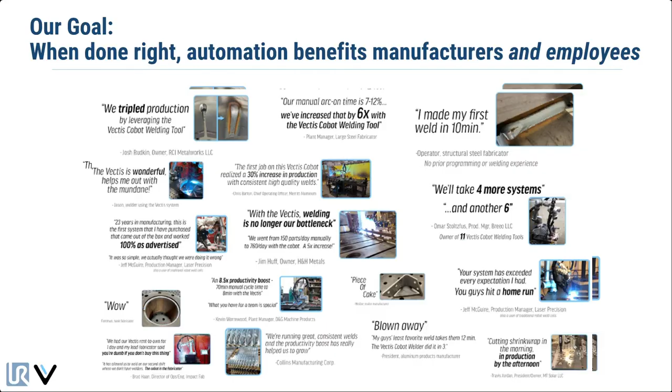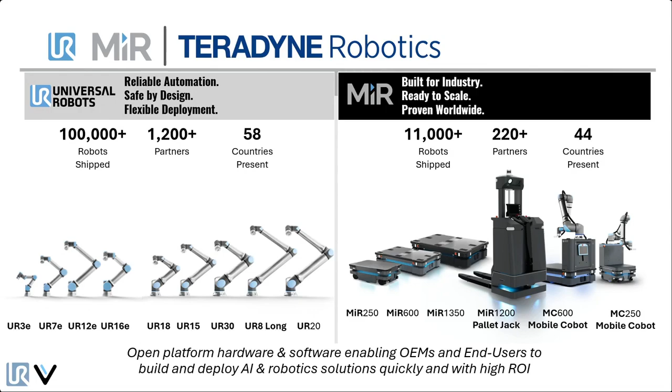So before we jump into who Vectis is, a little introduction on Teradyne Robotics. We have both Universal Robots and MIR, Mobile Industrial Robots. On the left, you can see our entire product offering, ranging from 3 kilograms all the way up to 30 kilograms payload capacities. On the right, we have our entire mobile robot platform, ranging from 250 kilogram deck loaders all the way up to 1,350 kilogram deck loaders, as well as pallet jack and mobile cobots. Today we're going to be focusing on the left side of the screen, but just to give you guys a picture of who Teradyne Robotics is as a whole.

Specifically when you're looking at the welding world, one of the biggest driving factors is an aging workforce. There are going to be a boatload of welders retiring over the next 15, 20 years, and this is a very powerful tool to help ease into that and really scale up the younger generation.

Economic factors that are driving automation include rising labor costs. Everyone knows how expensive it is right now, and with rising labor costs it is much more painful every time you lose labor. Automated welding solutions are allowing manufacturers to hang on to labor because it takes away some of the dull, dirty, dangerous work.

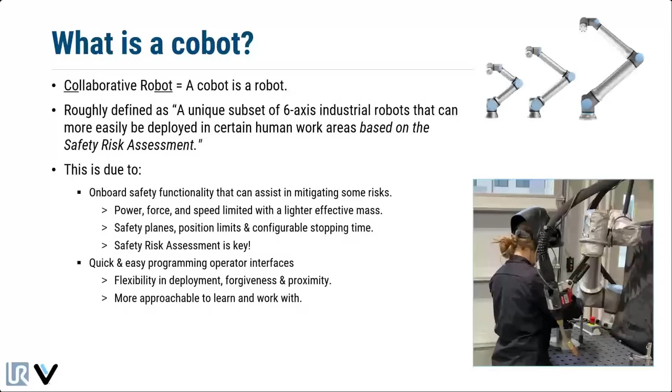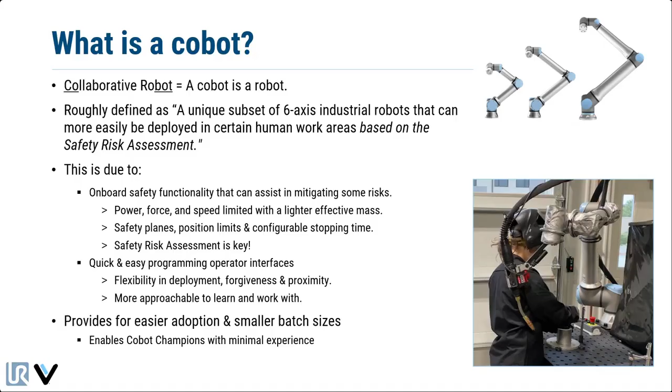With the easier, more intuitive interface, it allows for small batch sizes to be a lot more digestible. It's not taking you hours to set up parts, taking you a couple minutes to set up a new batch. So it allows you to automate a lot more parts rather than spending hours programming one new part.

You are going to be eliminating the dull tasks to keep your skilled laborers doing things that are more difficult to automate. You want to get the mundane stuff out of the way. You're trying to keep your environment as safe as possible. You're reducing repetitive stresses on any of your operators. You're giving them a fun new tool to utilize that's making their life that much more entertaining.

And you can also do all of this in a smaller footprint, which allows you to be more flexible with how you guys are going to be utilizing your overall factory footprint.

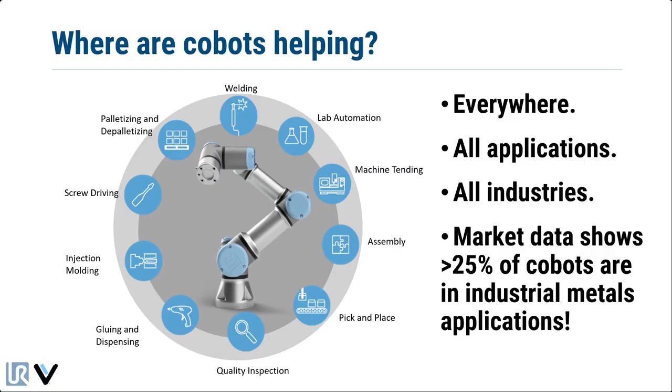Really anywhere that you have repetitive labor is a place that we can look to automate and help move that labor somewhere else, and really try to maximize the efficiency of your workforce.

So we've talked a lot about the robots so far. Robots are pretty useless without trusted integrators. So at this point, I'm going to pass it over to Josh to tell everyone about Vectis Automation.

Awesome, thanks Tommy, and thanks for that introduction as well. Like Tommy said, like I shared before, my name's Josh, one of the co-owners, co-founders at Vectis. We founded Vectis in 2019 with the goal of making automation more accessible, more approachable, more affordable for the metal fabrication industry.

Myself and many of my colleagues come from the traditional robot world. My first job was programming traditional robots and welding applications and managing those projects, and being kind of under the hood, out installing them, deploying them, servicing them. And over that time, really realized, hey, how can we make this easier?

Right around the time that we wanted to make automation easier and more accessible was when cobots were really coming to prominence through UR. Tommy may have mentioned it, but UR has been around for over 20 years, and cobots have been around for a long while, but they really started coming into prominence around 2018, 2019. So that's when we founded Vectis Automation to say, let's turn these cobots into useful tools for the metal fabrication industry with welding and cutting.

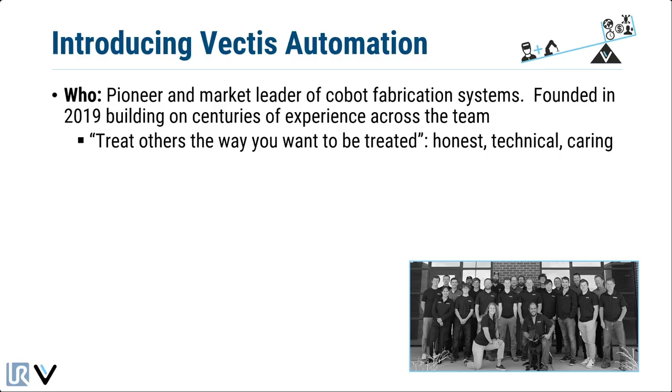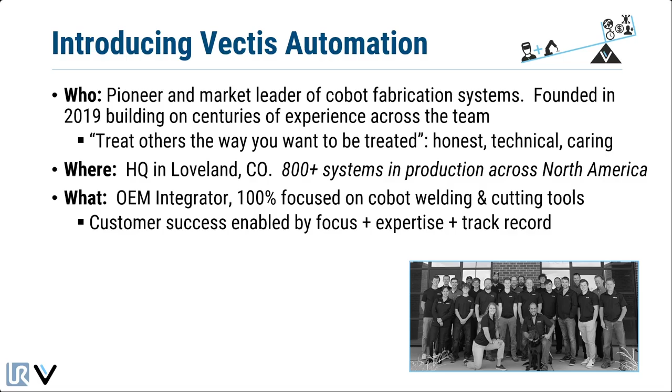And we're driven by an ethos, the golden rule - treat others the way you want to be treated. We're based in Loveland, Colorado, but we have systems all across North America - around 800, actually 830, serial number 831 is going out today. One of the things that makes us unique is that we're 100% focused on cobot welding and cutting, which allows us to not be distracted by other product lines.

And as Tommy mentioned, as I'm sure many on the call are already feeling, really what's propelling these solutions is the challenges that manufacturers face.

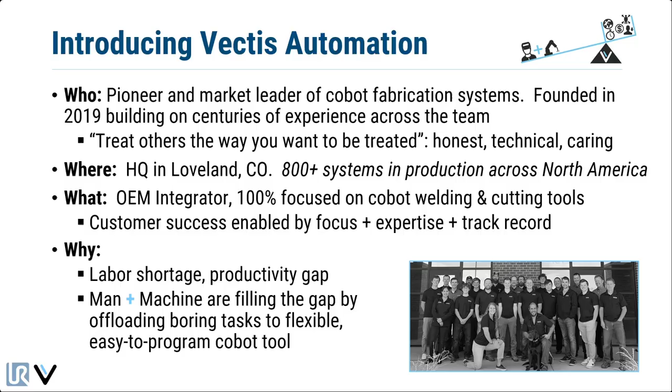Labor shortage, productivity gap - how can we do more with less? How do we relieve our team members of the boring, repetitive tasks? That's really what cobots are doing, helping offload what we call the boring arc time to the cobot, so that your skilled welders and fabricators can focus on the work in the shop that really requires that human eye and brain for adaptation. So how do we let humans and machines work together in a collaborative nature to solve those tasks, the best that each can? Let's get into the meat of what we're here to talk about today.

Some questions that we're arming you with to help empower your success and hopefully avoid dust collection or frustration. These are built on listening to and visiting thousands of customers over the last many decades, seeing what has worked and what hasn't, not just ours but others as well. We hope these are helpful to arm you to ask your partner or provider some tough questions, to make sure there are no surprises down the road.

I'm going to start with a framework, stealing from Maslow I guess, distilling these observations down into a hierarchy of needs for automation success. This is really about seeing all the places in my career where I've seen robots, cobots, automation of any type collecting dust versus when it's really doing well and cranking out parts and adding value to the business. What's interesting is that so often the focus is on the product or the robot, the pretty flashy software or whatnot.

And don't get me wrong, that's important. But if there's one thing I can share with you to take away today, it's that robot success is driven by the people in your business and the people that you partner with. Robots make it easy, cobots make it easier, but you need the people to drive the success, drive the solution.

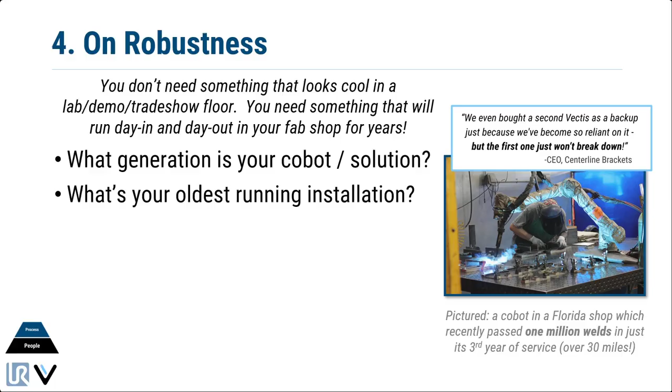And so, hey, what generation specifically is your cobot, right? Or what generation specifically is this solution that you're specifically looking at? What's the oldest running installation, right? What's the harshest environment that this specific system has been placed in, and how does it perform there, right? Good question is what tends to fail, right?

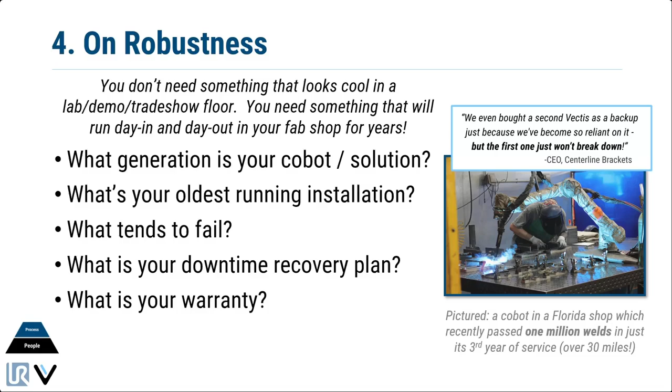I'm very wary, again, as a business owner looking at potential vendors that we work with, what tends to fail? Oh, nothing. Something always fails, right? So maybe it doesn't fail all that often, but there should be an answer to that question, an honest technical answer to the, hey, what most commonly fails, right? And then if something does fail, what is the downtime recovery plan? What does the warranty look like? What does that experience look like? Is it pointing fingers, or do you help me figure it out, right? Because no product's perfect, no business, we're not perfect, our products aren't perfect, but what do you do? How do you react when something goes not to plan, right?

So in that same vein, on the service process, the support process, and the process mindset of your potential partner—who is servicing the cobot tools? It can get easy to fall into what I call the warm body fallacy, where it's easy to say, oh, there's someone with a logo on their shirt near me. But that isn't always the best individual to support the broad range of needs that most automation equipment requires. So just being mindful of that, even in the vendor relationships we choose, I'm looking at who's the technical expert—whether remote or close doesn't really matter. Who's that individual we're going to call if we need something? And do I trust their character and their competence?

Another key thing: it can be easy to think of service just as break, fix, or warranty. I'll be honest, that's the more rare service call—something's broken. The most common support call we get every day is, hey, I'd like to optimize my program. I want to take some air moves out, I want to speed it up. Hey, I want to take some spatter out of my weld. I want to try metal core wire, or do some vertical up with flux core. It's more application-based questions.

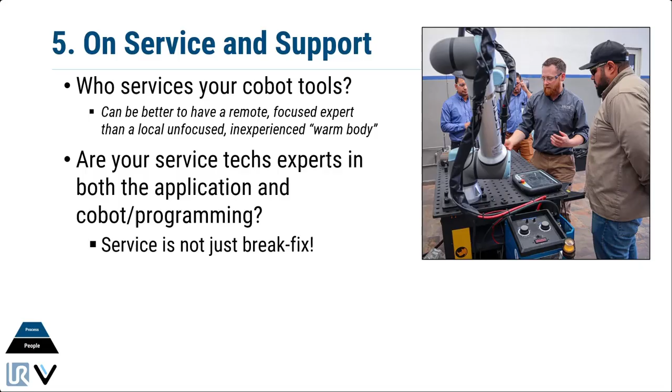So make sure you have a partner that can support both the much more common application questions, as well as the break-fix stuff when that happens. Where are spare parts stocked? If I need something, can it be overnighted? What does that look like? And then, do you have a right to repair? Can I perform my own service?

We're seeing this trend, I think mostly in other industries, this idea of like, hey, I can't repair anything on my own—I've got to take it into the dealer or somewhere else because it's a software or computer thing. So, how much can I repair on my own if I so choose? Just knowing what that looks like so you go in fully aware, again, to that no-surprises goal.

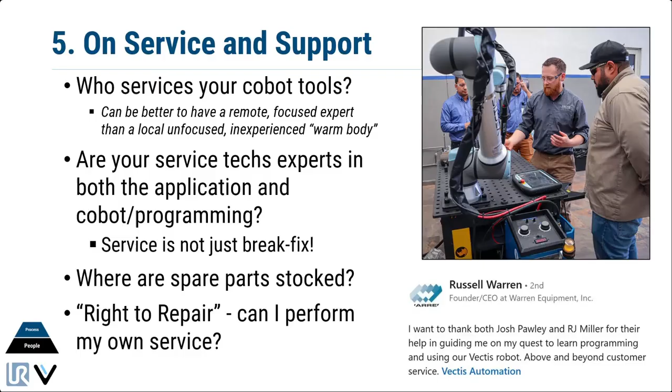To the process on safety: you want your integrator partner to take safety seriously. A common phrase is, hey, everything's fine until it's not. So you want someone thinking about the full gamut of safety concerns, so you don't have that 'until it's not' day or moment. Ask them, hey, what are the actual safety measures built into the cobots?

Broadly speaking, you have the kinetic hazards of the robot mechanism, the electromechanical hazards of the system, and then the application hazards—in our case, welding and plasma cutting. Those differ between applications, but how are they handling each of those broad categories of safety hazards?

Those are all covered in the safety risk assessment, which is an A3 ISO document. Any integrator worth their salt will know what that is and have completed one for the systems they're proposing to you. So go ahead and ask for that, and ask them to walk through it with you. A good integrator should say, yeah, let's hop on a call and go through it, share the hazards and how we're abating them, and make sure that fits with your safety EHS methodology in your facility.

And if you want a good barometer of whether they take safety seriously, that's a key part of A3's Certified Robot Integrator certification program—does this entity take safety seriously? So you can look for that sticker as well. Typically, someone certified by A3 is worth their salt on the safety side, and a number of other sides too. In fact, most of these are questions that I'm offering here.

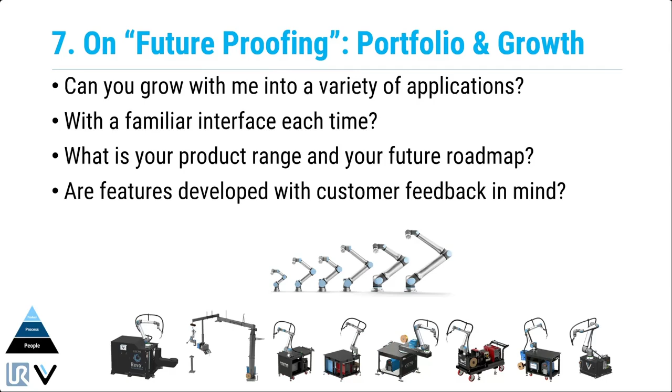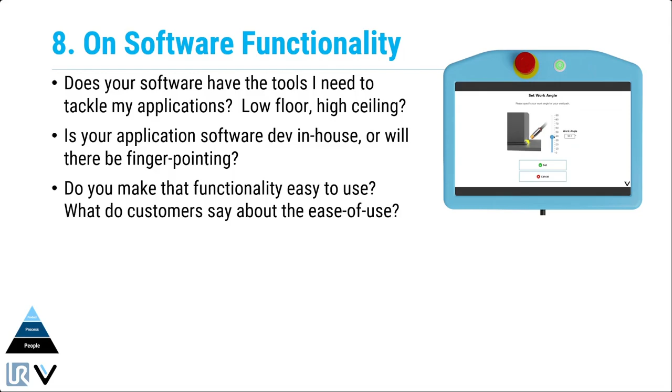On the software, this is a key to success, absolutely. I think this is one of the core enabling factors for cobots and easier, more adoptable automation in general. How do you lower the learning curve and add tribal knowledge of how to program robots successfully into the software? That has been a critical success factor for cobots of all types and all applications. This is really key.

Here's my encouragement that I've seen in the industry over the last few years: a lot of folks have developed the trade show demo software. It's going to look easy, we're going to weld a little T-plate in 30 seconds, and that's great. I call it kind of like the low floor. A lot of folks have gotten the low floor down because it's the easiest to start with. But what I hear from customers that have experienced other demos is that that's kind of it. It's a very tight floor and ceiling. They got the trade show demo down, but they haven't actually developed the under the hood, the back end stuff that's needed to tackle most applications.

Multi-pass, changing weld parameters as you go, managing corners, managing transition angles into and out of corners, doing dwells for vertical ups, all these different nuances of welding and plasma cutting. How do you do projection cuts? How do you do bevels? How do you do circular interpolation around all these different things? So really ask, what does that ceiling look like? Everyone can do a slick little demo on a trade show floor, but what does the ceiling look like for actual use in my shop? Sometimes the best way to look at that is to ask them to bring you to another shop where this is being used.

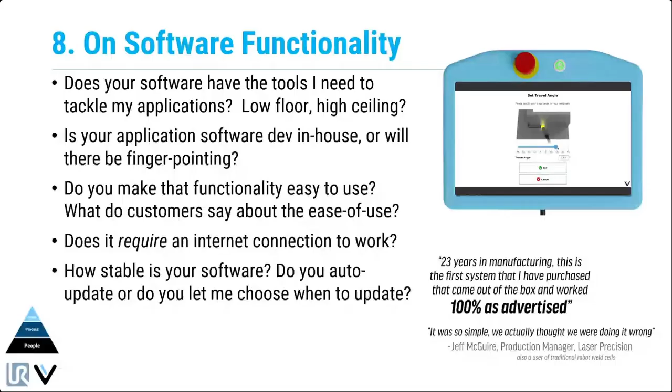On the product as well, a big part of it is the training. What types of training do you provide? What will training cost? This happens once a week, I swear. We get a call, hey, my champion moved on, or they're in a different role now, or they're having to take some short-term or long-term leave. How do we get someone trained up ASAP? Usually that someone is a fill-in, like the foreman, or my manufacturing engineer wearing another hat, or our laser operator wearing another hat. So how quickly, easily, and affordably can you train another champion? This happens all the time.

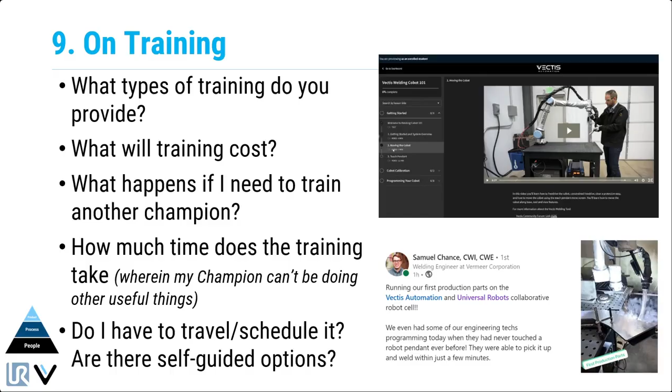So look into that: is there self-guided options, videos, an online academy, or do I have to fly out to your facility? Or do you have to have a tech fly out to me? What does that look like? Scheduling always takes time, so be aware of the full gamut of options. Do you have self-guided training in addition to in-person options? It's a good question to ask, so you can be prepared for the commonality of champions moving on or needing to train another champion. Or, we see it a lot too, hey, I want to train a second shift champion. How can you get them trained up in an affordable, quick, and efficient way?

And then finally, on the product side, the pinnacle of the commercial details: I would ask, how can I reduce the risk of transacting with you? Do you have a money back guarantee? Do you have a rent-to-own program? Those are some things we did to reduce that risk and really put our money where our mouth is, on doing the right thing together with the customer, looking at the application and guiding to success, so they're going to be successful with this for the long term.

What's your lead time? What are the hidden costs or fees? I love this one. I hate this as a consumer, the surprise billing kind of stuff. We've heard some folks that got a tariff bill after the fact. So ask them, hey, what is the landed cost at my facility? Is this all inclusive of tariffs, or is there going to be a surcharge? Am I going to get a bill from a customs broker? We do all our pricing landed, so just ask that and make sure you know that ahead of time.

Where is this final product being built, and where is it being shipped from and to? Is shipping included, or do I need to add that? Is that LTL, or is that a dedicated truck? Do you have any recurring subscription costs? A lot of the solutions on the market do, recurring revenue is all the rage. So ask, hey, will I be able to use this?

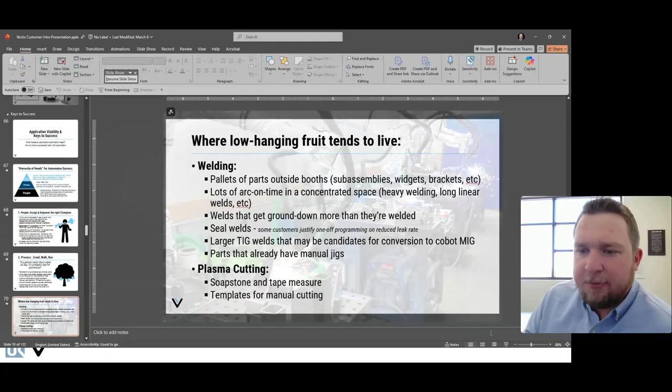So here are some recommendations on where we most commonly see what we call the low-hanging fruit, those crawl applications. The obvious one is pallets of parts outside of weld booths. That's been the typical automation application, higher volume stuff. What I think cobots allow for, what we hear a lot, is cobots allow high volume to be a lower amount. We have customers doing batches of 20s, 50s, 500s, 300s, and then of course in the thousands and 10,000s - that's where the economics get really easy.

Sometimes, depending on the part and a lot of things, the batch size can be smaller. One thing to consider when looking at the economics: don't look at the stopwatch time. If you time your best welder versus a cobot doing the same task, they're going to be very close. In fact, usually the welder wins.

Where automation helps is if you look at an 8-hour, 40-hour, or month-long period, the arc is on for longer amounts of time. When you tell it to do something, it keeps doing that over and over quickly. So that's where we see, could you really get an economic case on those 500 widgets? Sometimes yes, because sometimes producing the batch of 500 takes quite a bit longer, not just the single-weld stopwatch time. We're hearing from most customers it's about a 3x productivity boost as the middle of the bell curve.

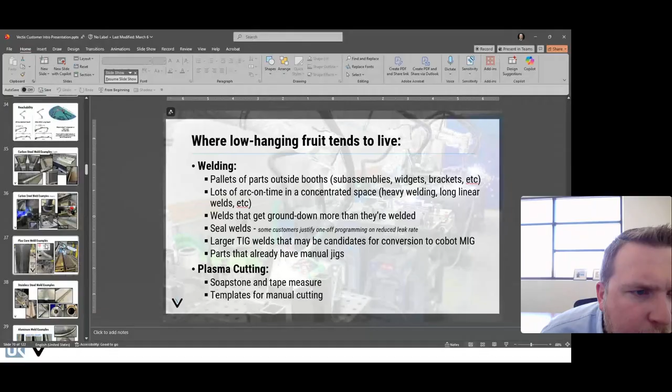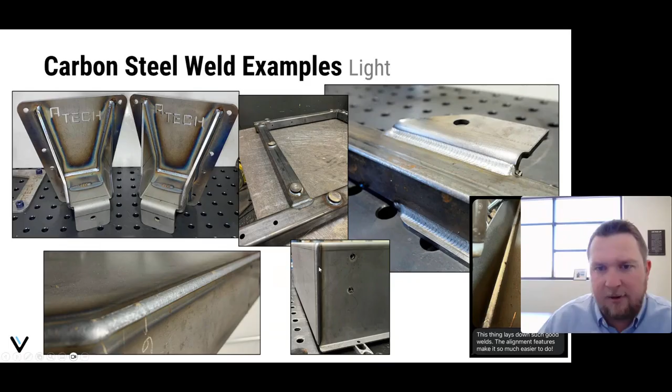Outside corners on electrical enclosures, 11 gauge carbon steel. They were TIGing that before, then had to grind it smooth. Now they just MIG it and send it straight to bead blast and paint. I think it was like a 15 or 20x productivity improvement. So look for places where you're grinding more than you're welding.

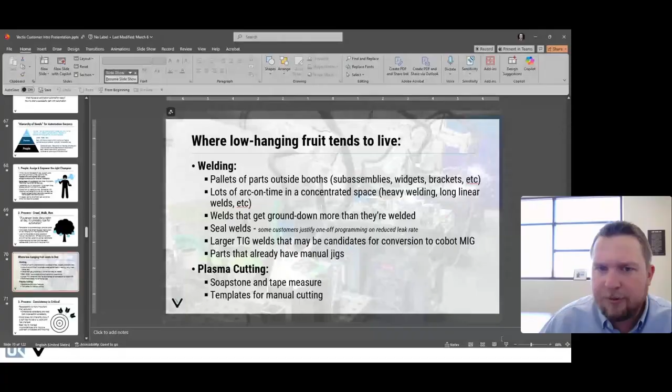Seal welds, like on tanks, or where you have a lot of rework, can be a really good fit. If you're doing TIG, maybe bigger TIG welds could be a candidate for conversion to cobot MIG, like that outside corner example. Also, parts that already have manual jigs are typically a good indicator of some level of volume and consistency.

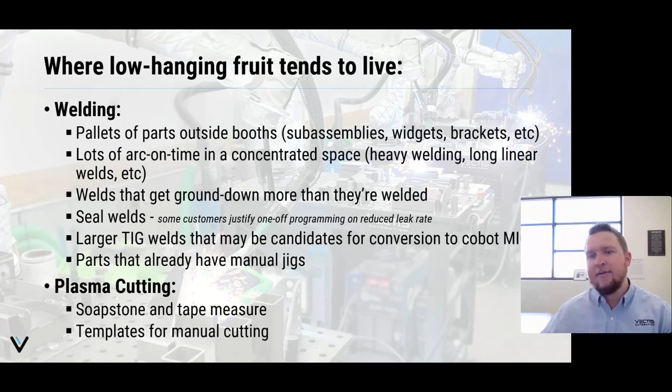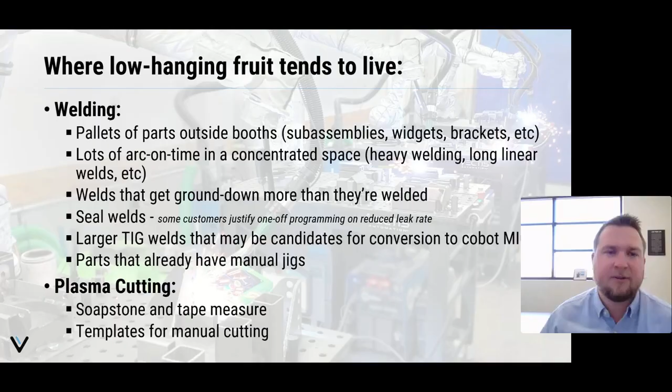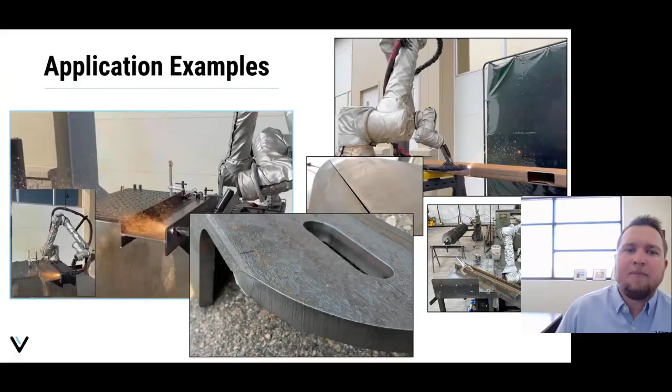On the plasma cutting side, we see most folks doing 3D shapes or large assembly cutting. Anytime you see a soapstone and tape measure laying out a template, or a customer using cardboard templates and a Sharpie spending hours to lay out 2 minutes of cutting, you can automate that layout process by repeating the program. We've got folks cutting forklift pockets and tubes, coping I-beams, coping angle iron, coping C-channel, cutting cylindrical shells, cutting square holes, beveling - there's some examples there.